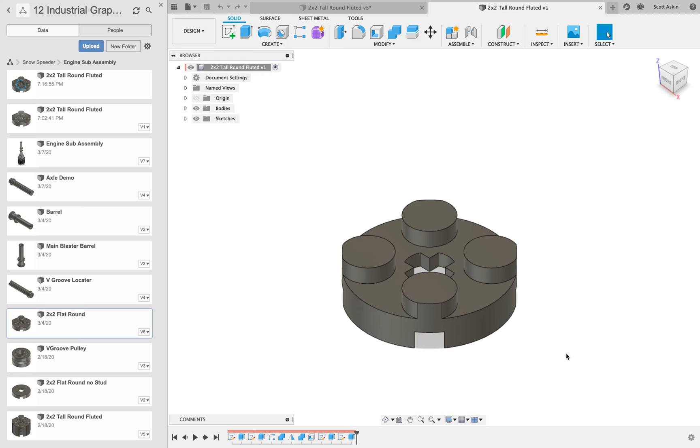If you look down the timeline here, you can see we started right back at the beginning with a 1x1 way back here. So if I went right back to that original extrusion and made it taller, then the whole thing then should become taller.

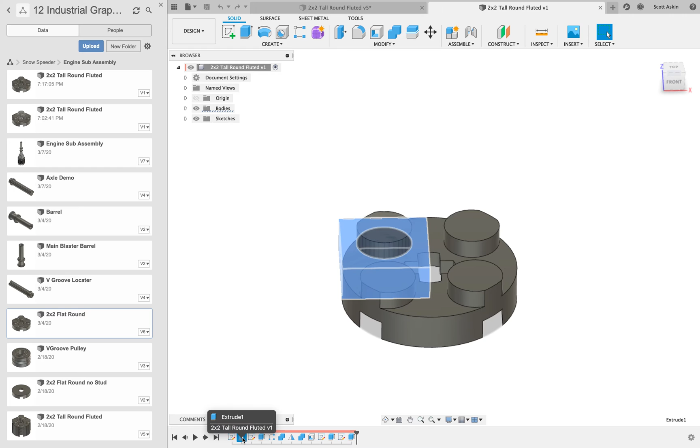So let's try that. I've just clicked on that. There's the first sketch, there's the first extrusion. Select it, then right click, edit feature. And the height, rather than being 3.2, is going to be 3.2 times 3. So you can just type in asterisk 3 and then click OK. And the whole thing then has got taller.

What you'll notice though is this kind of weird bit of mine on the bottom here. Yours may or may not do that. That's when I've cut the circular shape off later on.

Now I've made this taller, the extrusion isn't quite long enough. So to get rid of this, I just need to go make the circular extrusion, which was the last thing I did from last time I worked on this. So I just do this and go back one. That was the axle. This should be the extrusion.

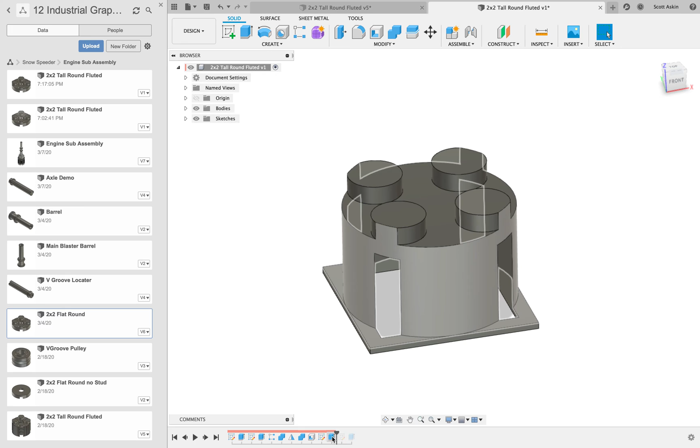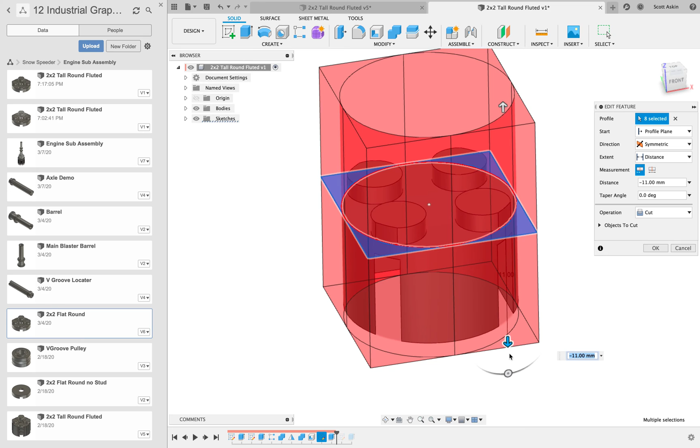There it is there. So I can safely say that this extrusion here, extrude 4, if I was to edit it, select it once, right click, edit feature, you can see here we did that symmetrical extrusion above and below, but I just didn't make it long enough, so I'm just going to drag that down a bit further. So now it cuts the base right away. Like I said, yours may or may not do that depending on how long you made that original extrusion.

Okay, I've got rid of that. I can see another sort of weird error with these large sections cut out here. So what I might do is also at this point get rid of that shell that was there. So select the shell, right click and delete. And now I've got myself a solid object.

I'll bring the timeline forward, which will also then include the axle. And you can see that the axle hole is also not all the way through. So what I might do here is I might actually apply a shell, but I might wait until I've actually done the fluting around the outside first, just to see what happens.

Okay, so just to get back to the one that's kind of already drawn, this fluting is basically just one triangle drawn here, extruded to make into a V cut, and then we just pattern that around in a circular pattern. So to do that, it's not hard.

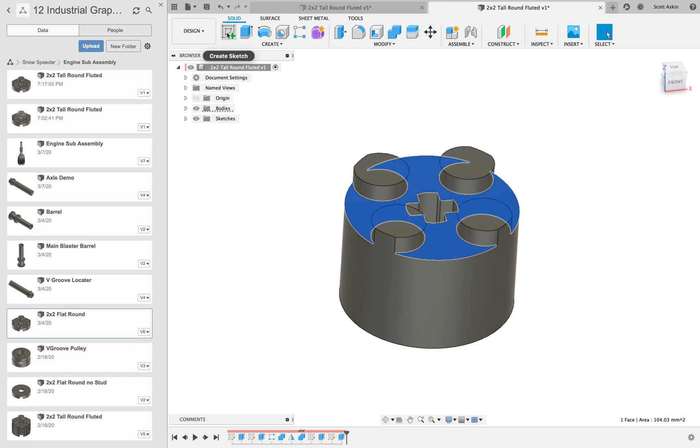You just select the surface that you want to put the V cut profile onto, which in this case is this top surface here. Go to sketch and zoom right in just on this one corner here, or one point of tangency.

And I'm going to make some executive decisions about how deep this V is. So just use the line tool, L for line, snap to the outside of the line like so, and let's make the depth of this V 0.5 millimeter, so 0.5, and hit enter.

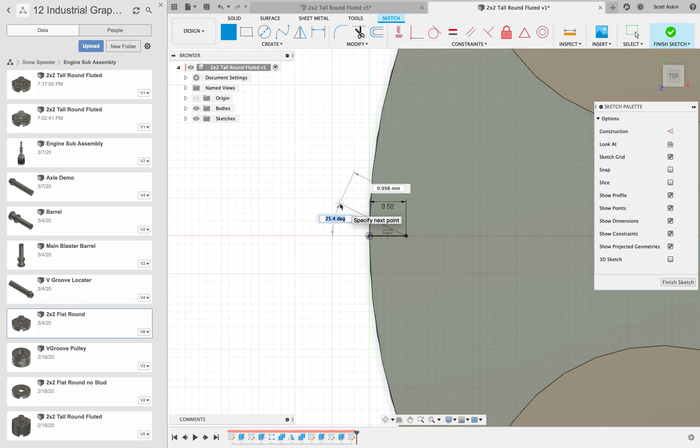And then hit line again, and then I want you to draw 2 lines at 30 degrees to this line, and I want those lines to extend out here past the outside of the object. Just makes life easier. Now I don't know the length, but I do want the angle to be 30 degrees, so I can use my tab key on my keyboard, and you can see it then toggles between the length and the degrees, and change the degrees to 30, then hit your return button.

And then do that again, so L for line, this time snapping to the corner, and once again hit the tab key, change the angle to 30. I really don't care how long this is at the moment. And then the last thing to do is we'll just close these 2 together. It really doesn't matter what that shape really is, or how long these lines are, as long as this triangular profile protrudes past the outside of the object.

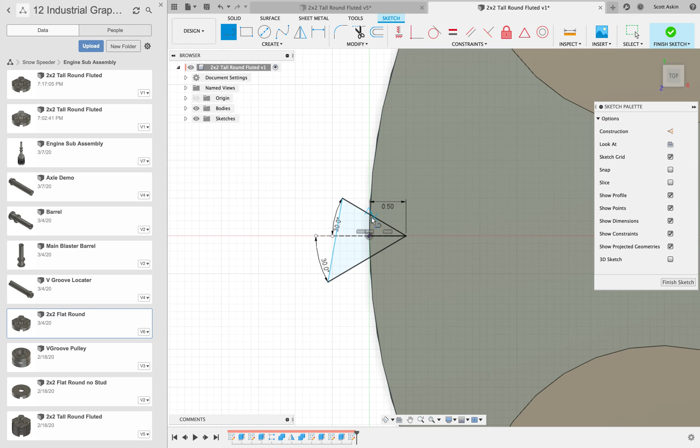I did try to make it snap to it before, but that caused too many problems. So I'm going to finish that sketch, turn things side on, and then use that sketch—all 3 of those profiles—since it's not selecting just one, and extrude it down.

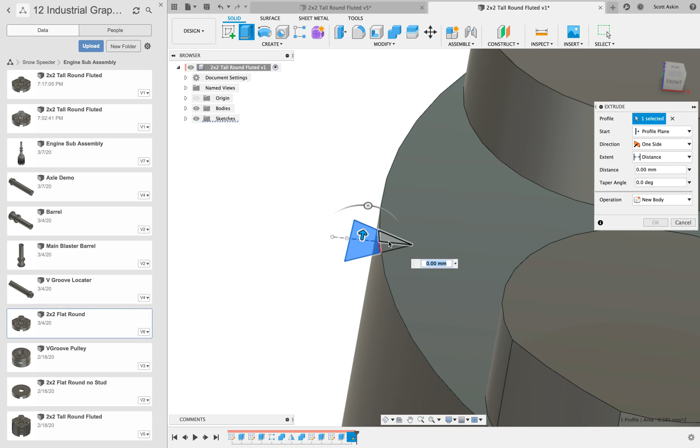Better to go and extrude first. Grab all 3 profiles, then drag that down so it makes the V cut into the side of our tool piece. Make sure it's set to cut, and okay, let's have a look. Yes, that looks good—that was the last extrusion.

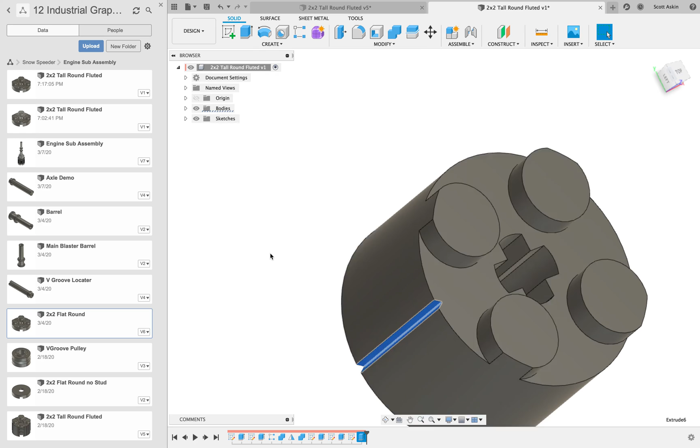Now let's use a new technique called circular pattern to repeat this around the outside. Select the last extrusion, which is the one we want to pattern, then go to Create and scroll down to the pattern command. You've got a few options: rectangular, circular, or pattern along a path.

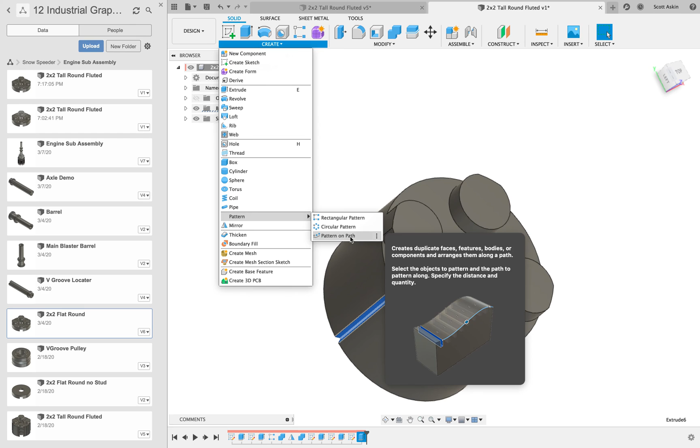Let's choose circular, and this dialog box pops up. First it asks what you want to pattern—features, bodies, faces, or components. This extrusion is defined as a feature, which we've now selected.

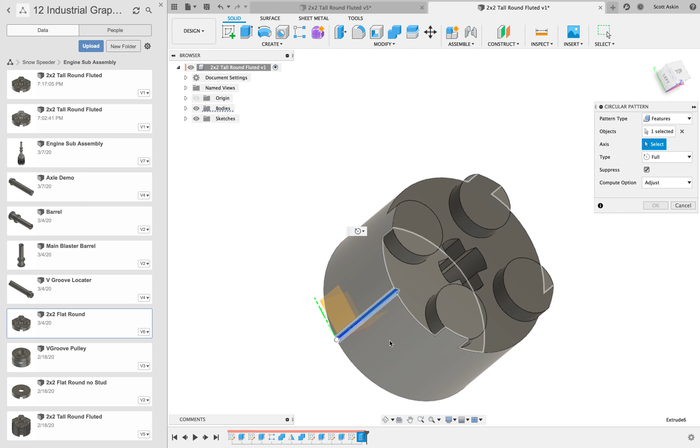It's now asking for the axis. Click into the axis collector, and choose the circle you want as the axis—not this circle, but this one, or this cylinder, the outside face. It defaults and finds the center—you can see the little mark there for a second. It's defaulted to 3 patterns.

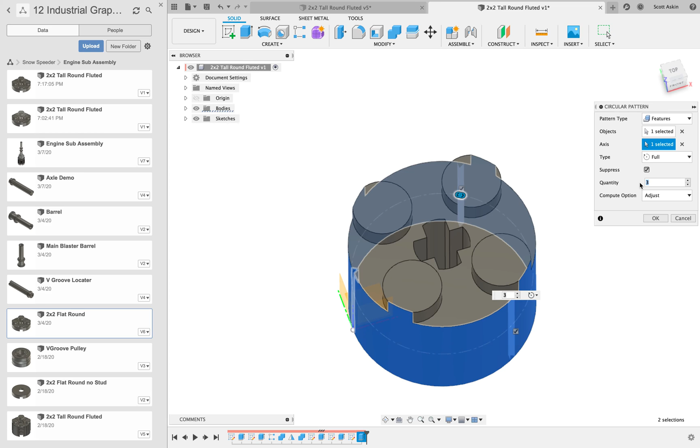Obviously 3 is not enough. I did a bit of mucking around before, and it chose, I think, 54 from my previous state. It told me there were too many, so I'll drop that back.

Sorry about that, people—my computer's mucked up. So back to this again.

It told me just before that 54 patterns was too many, so I'm going to drop that back to 48. It hasn't come up with any error message, so 48 must be good since it's not going back over itself. Let's click OK.

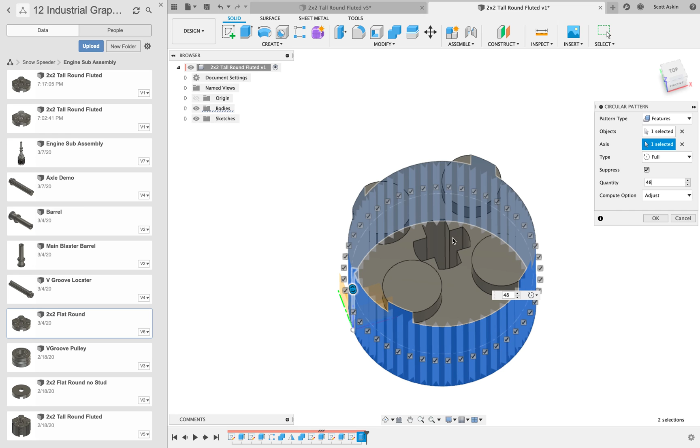As it does its thing, let's have a look to see whether it's made it even. I might click onto my view cube—it's not working, which is a worry. Okay, but it looks to me like it's okay.

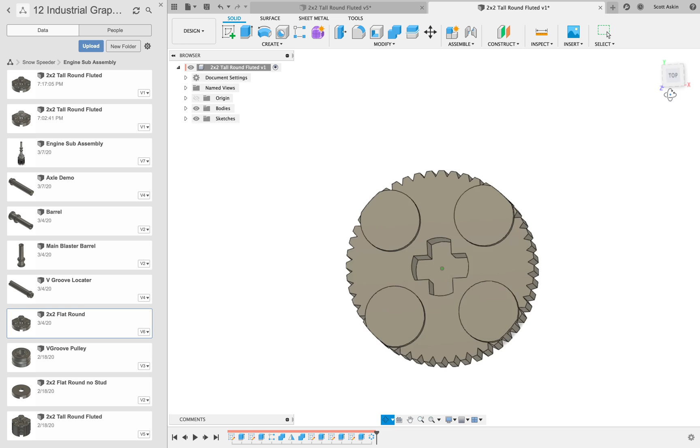I can't see any large flat section, but if you ever do, there are a couple of things you can muck around with in that pattern tool. I'll just right click on it and edit the definition to show what I mean.

This here is really cool: optimized, identical, and adjust. If you leave it on adjust, it works out it's going to do 48 patterns with exactly the same distance between every one. Optimized and identical—I haven't played with those too much, but adjust is really handy.

These little ticks here let you turn individual patterns on and off if you wish—you may find a need for that sometime. And up here you can pattern not just by full, but by angle and also symmetrical. Okay, let's click OK to that.

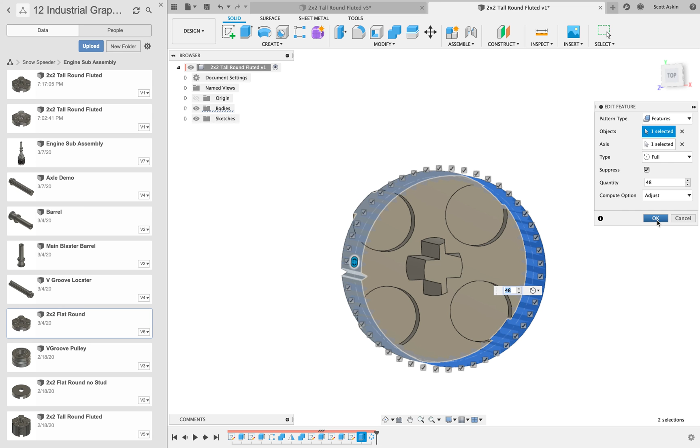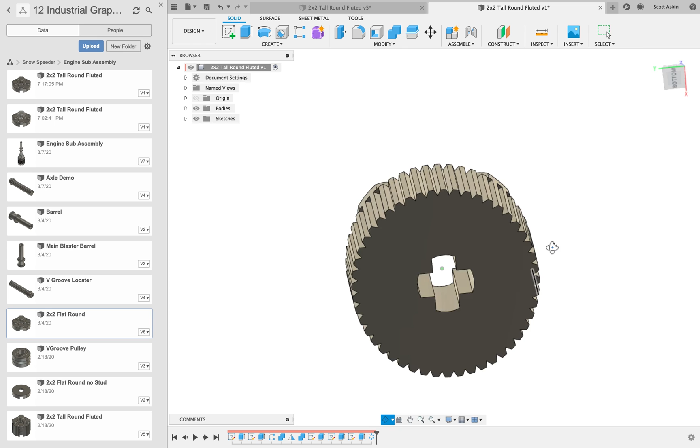The last thing to do is probably extrude this all the way through—I think that's this extrusion here. There it is. I'm going to make that a little deeper to make sure it cuts all the way through, and then I'll show you something that doesn't quite work, and how to solve it.

I want to shell this thing out, so typically you'd select the bottom surface, go to shell, and type in 1.45. Now it comes up with an error because it can't shell—this geometry is too tight.

So you say to yourself, what am I going to do? The solution is to actually do the shell before doing the fluting. To do that, it's a little tricky, but with the timeline you can just roll it back so the fluting isn't done yet, even that single flute.

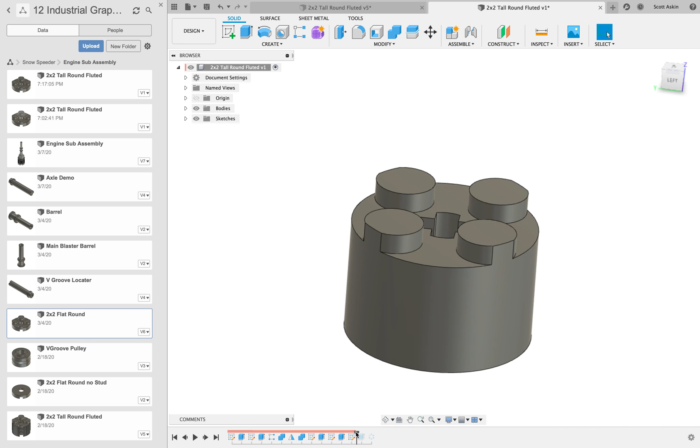I'm going to go back another one. If I do the shell now, it should have the desired effect of doing the shell with the flute done afterward. So shell, 1.45.

You can see it's doing this weird thing in the middle as well. So I might cancel that shell and go back even further, and do the shell before I extrude that axle.

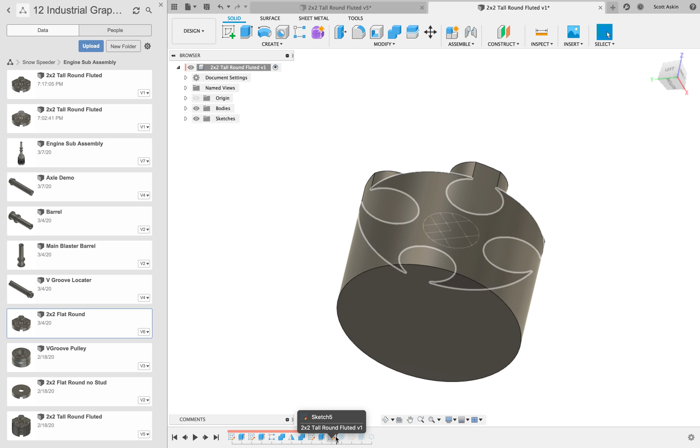So I'm going to do the shell there—you can see I'm inserting a shell at this point in the timeline. That's the main thing I wanted to show you, I suppose.

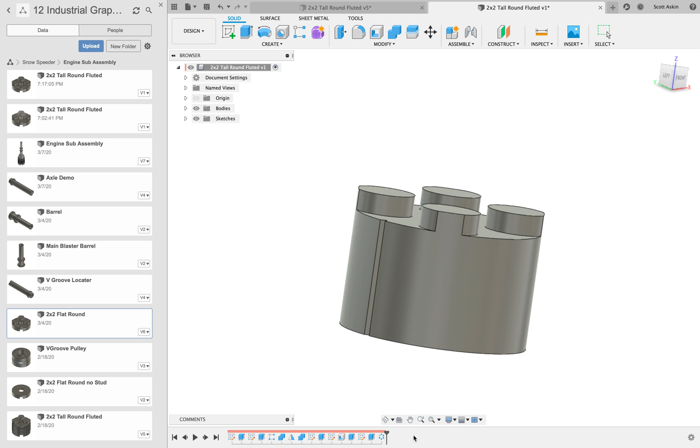Select that bottom surface, select shell, 1.45—we're inserting a shell back here. Click OK. Then if you drag your timeline forward, hopefully everything else will follow it: there's the extrusion, there's the sketch, there's the V groove, and last of all, hopefully there's the pattern.

Hooray! Okay, so I think that will probably do for us for that tutorial—have a go at that one.